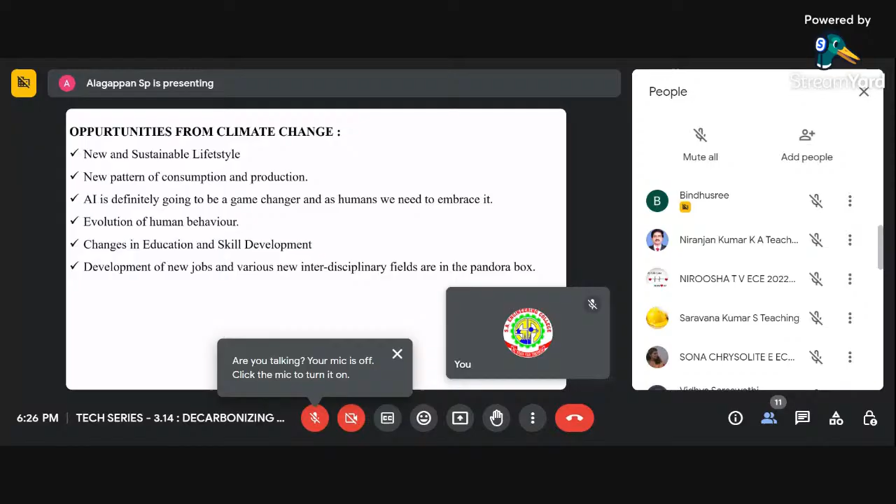Every one of us must have seen this 1.5 degree Celsius number and 2 degree Celsius number. We all know the significance of this number, because 1.5 degrees Celsius refers to the global rise in temperature, and 2 degrees Celsius also refers to the global rise in temperature.

But these two numbers are to be met at different periods of our lifetime. For 2 degrees Celsius, the Earth's rise in temperature must be maintained below 2 degrees Celsius for minimal damage. But to avoid the adverse impacts of climate change, we definitely need to meet the target of 1.5 degrees Celsius for the global rise in temperature.

Each one of us knows the problems that arise due to this: extreme weather, species degradation, water availability is getting reduced. Already we are facing water availability issues, and the Arctic and Antarctic, the polar regions, are melting continuously. And one interesting fact is that yesterday the UN published a special report on a temperature called wet bulb temperature.

What does the wet bulb temperature refer to? It means it is the maximum temperature up to which our body can handle and regenerate and cool itself without any external agents. The minimum threshold for this wet bulb temperature is 30 degrees Celsius.

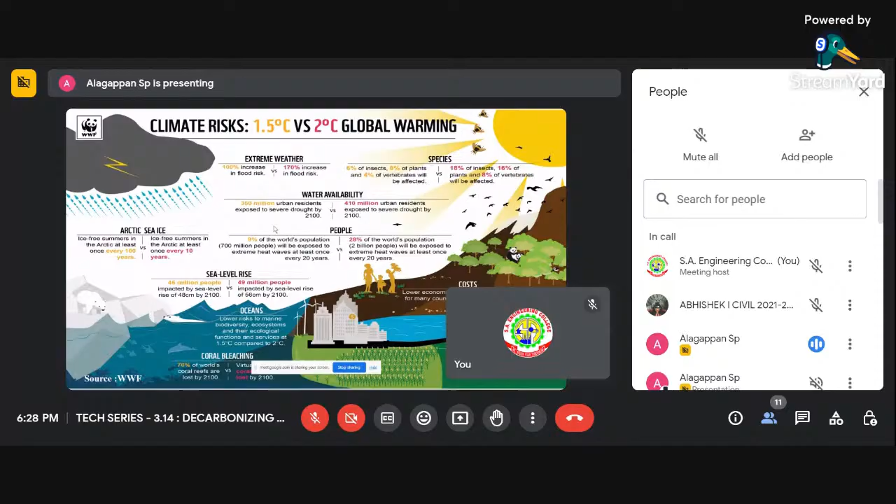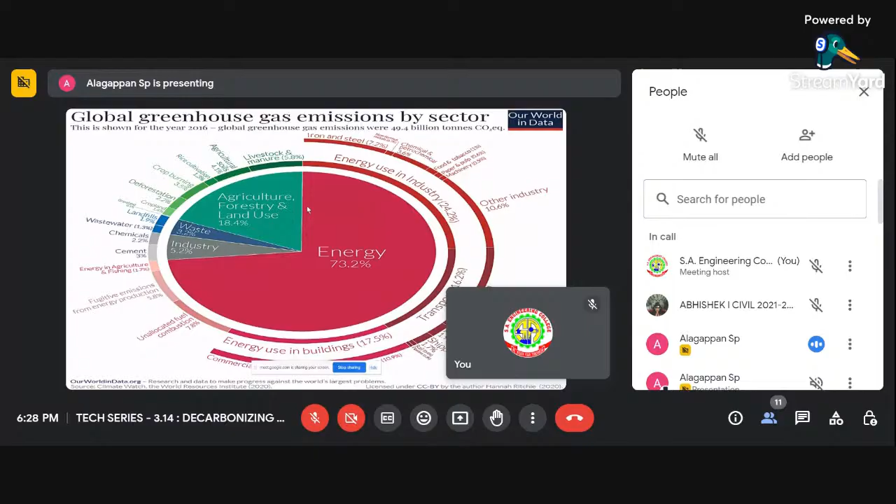This is one of the major drawbacks of climate change, and it's going to have a huge impact on the built environment also. The majority of global warming is caused by energy consumption: around 18% from buildings, 16% from transportation, and around 24% from energy use in industry. Energy use in industry and buildings itself comprises around 42 to 43%.

So this topic is going to mainly focus on energy use in buildings and energy use in industries, and also some industries related to construction: cement, chemicals, wastewater generation, landfills. All of this comes under built environment.

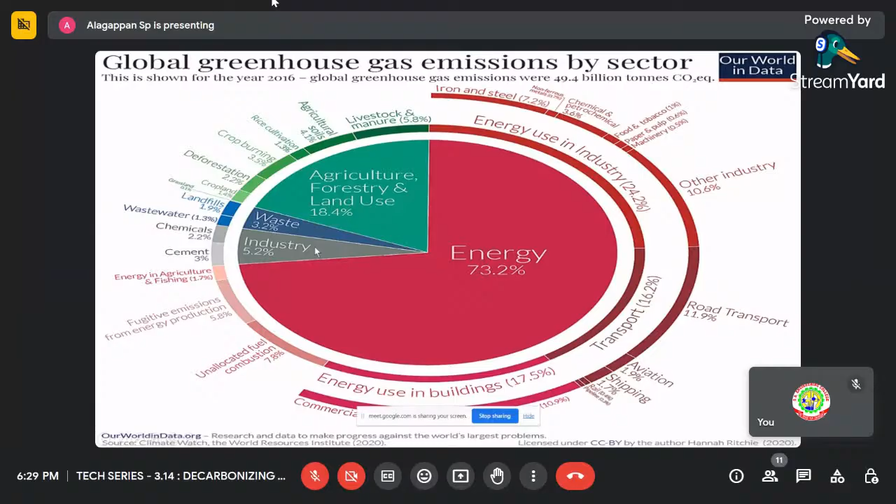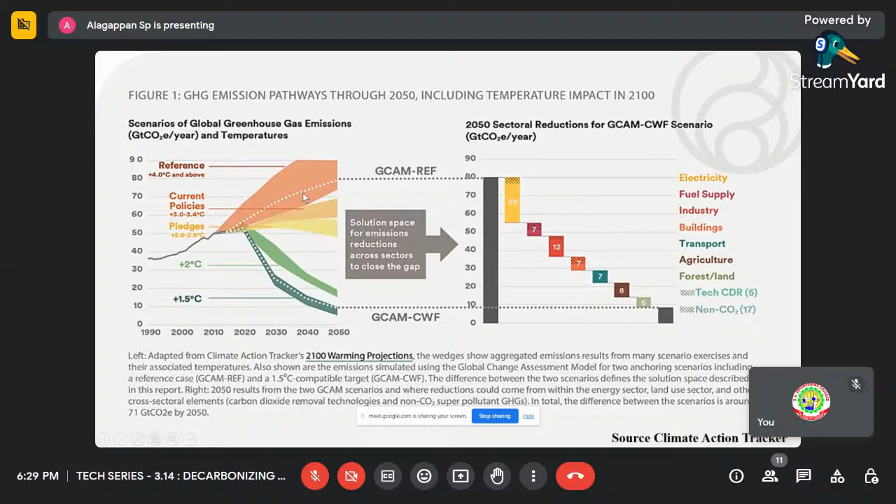That's why decarbonization in the built environment is one of the important factors for net zero transition. When I'm speaking about decarbonization in the built environment, it refers to both the existing buildings and the infrastructure that is going to be built in the future. So these two conditions are to be considered for this decarbonization.

During this process, we civil engineers alone cannot handle the situation. We need help and guidance from almost all sectors, including architects, environmental engineers, energy engineers, mechanical engineers, electrical engineers, instrumentation, chemical, biotechnologists, software engineers, policymakers, economists. Each one of them will play a specific role in decarbonizing the built environment. Only civil engineers cannot achieve this, so we need help from all kinds of people.

When talking about carbon in a built environment, there are two types: embodied carbon and operational carbon. Embodied carbon refers to the carbon dioxide or greenhouse gas emissions produced during raw material procurement, manufacturing of those raw materials, and transportation of the raw material for construction, and also during installation and construction process.

During the use phase, operation refers to operational carbon, that is the energy usage, water usage, and also waste disposal during the operation phase comes under operational carbon.

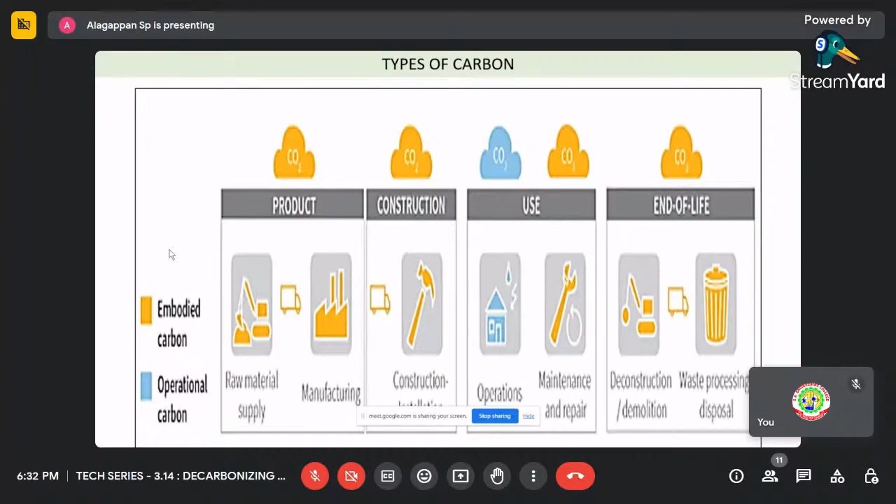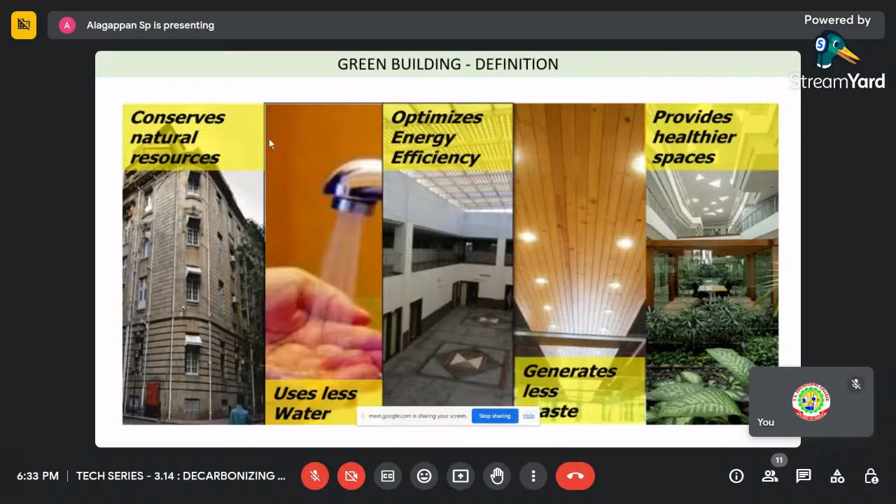So the main focus of this lecture is green building. Green building refers to the use of natural resources wisely during the construction and less water usage, optimize the energy efficiency, generate less waste, and provide a healthier spaces. Not only these definitions comes under the green building definitions, also the transportation of these raw materials and the one mentioned in embodied carbon also comes under the green building definition.

So somebody has to certify that this building meets the parameters standards. So there are some agencies around the world and in our country also. Some green building certification programs in the global level is LEED, that is under the USGBC, WELL certification and BREEAM certification. In India, majorly we focus on IGBC, that is the Indian Green Building Council and the Griha Council.

IGBC is one of the oldest institution in India, which started in 2001, and almost 90% of the projects in India currently are registered in the IGBC certification program. Griha also play a major role, but the number is very less.

So talking about IGBC, the vision of the council is to enable a sustainable built environment for all and facilitate India to be one of the global leaders in the sustainable built environment by 2025.

Today, almost the IGBC certification is done for 31 categories. Here you can see new building and existing building also, residential societies, that is apartment category, affordable housings, housing units, and also industries, factories, schools, hospitals, healthcare, resorts, restaurants, special economic zones such as industrial estates are also certified

for the IGBC certifications. Some focus is given on IGBC green interiors and also for service related buildings, some logistic park, infrastructure oriented business such as railways, MRTS, metro, airport, harbor, all these comes under this certification program.

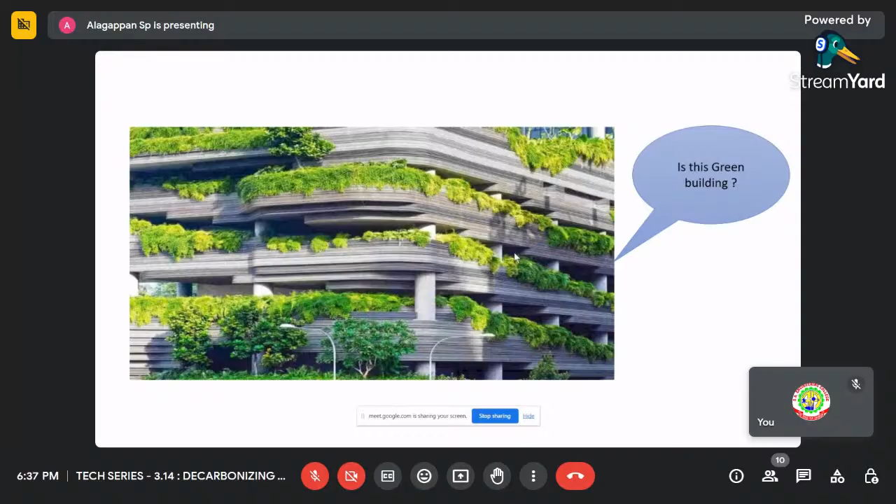So talking about green buildings, is this green building? The answer is it depends. Yes, at some cases this can be a green building. You might have seen the plants and mini sheds which are located on the balconies or windows or any special structures from the building or protruding from the building's exterior units. Sometimes it can be considered as an indicator in green buildings, but sometimes it is not. So it depends on the situation and the infrastructure we are focusing on.

So the IGBC mainly focuses on 5 categories. It was built on the Panchabhuta principle, that is the earth, water, energy, air, and sky. And these principles refer to the sustainable sites, water efficiency, energy efficiency.

Air refers to the indoor environmental quality, and sometimes the outdoor environmental quality is also included in the IGBC rating. The sky refers to daylight and night sky pollution, and some natural lighting is also included in the rating areas.

Here you can see 4 certification levels: platinum, gold, silver, or certified, based on different rating indicator numbers. Buildings are rated on a scale of 100. The basic score required to get the certified category is 49 to 50, and it increases up to platinum. Platinum refers to buildings of global importance in the green building sector, and gold refers to buildings of national importance. Silver and certified also have similar levels of importance.

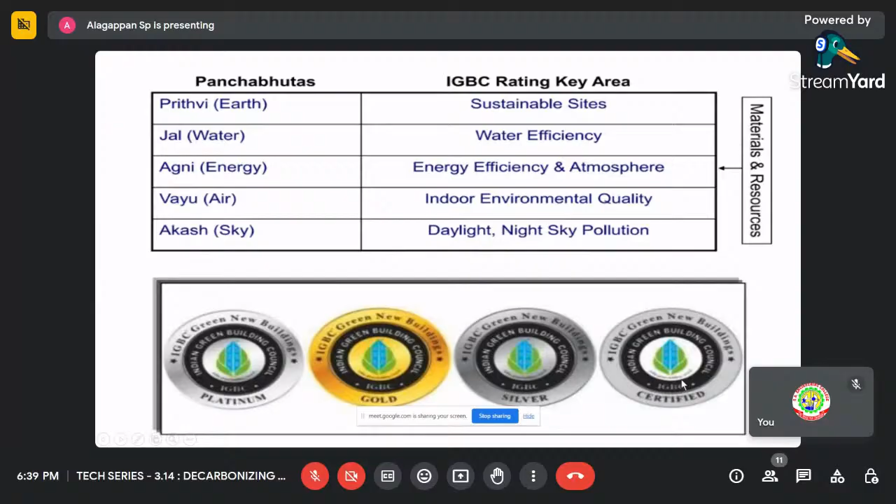Speaking again, this is the main area of focus of the rating systems: water conservation, handling of consumer waste, energy efficiency, reduced use of fossil fuels, and reduced dependency on virgin materials. Virgin materials refers to the use of fossil fuel materials or highly embodied carbon materials in the construction of buildings. Some building materials and resources also need to be accounted for this purpose. Health and well-being of the occupants, that is the indoor environment, is also accounted for.

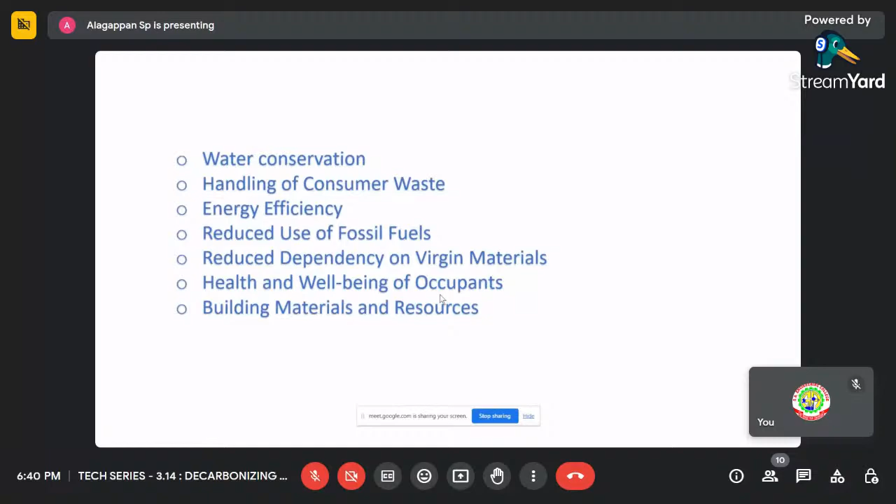Now we are going to focus on each category and what indicators are to be scored under each of these categories.

Here you can see the market potential of green buildings in India is around US $300 billion.

Material or equipment replacement that needs to be followed in green buildings includes usage of high performance glass, fly ash blocks - currently replaced with AAC blocks - wall and roof insulations, and high albedo roofing materials. Albedo refers to high reflective surface materials; a perfect example is white paint, which is a high albedo roofing material. Also, use of low volatile organic compound paint, adhesives, and sealants. Some carpets are also certified as green.

Some wood materials and eco-friendly housekeeping chemicals are used, for example the ones used for cleaning the bathroom, toilet, or mopping the floor. Some chemicals need to be used eco-friendly, and this usage of material is also considered an indicator in these green building certification programs. Some of the IoT systems are CO2 sensors, wind towers, water zone and root zone treatment systems, or water treatment plants. Nowadays, waterless urinals are being used for reduced water consumption, and energy simulation and energy monitoring devices are also used in green buildings.

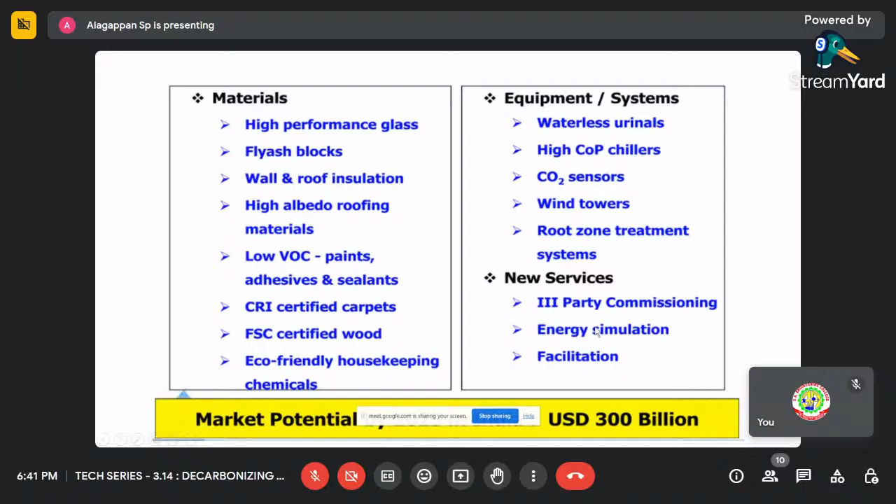Now I'm going to focus only on the indicators, not on their importance. Different indicators have different importance and different scores, so I'm not going into very much detail.

The first one is sustainable architecture and design, which consists of 3 credits, and site selection and planning. Almost the site selection and planning is the major area where the majority of the indicators are counted - local building regulations, soil erosion control, basic amenities, and usage of low emitting vehicles. For example, in office environments, colleges, or institutions, business commuting and office commuting is one of the important factors, and emissions from these vehicles are also considered for the IGBC certification programs.

Some other indicators are transplantation of trees which we fell, cut, and replace and preserve in different places; heat island reduction; outdoor light pollution reduction; and universal design. Some green building guidelines also cover basic facilities for construction workers during the construction process.

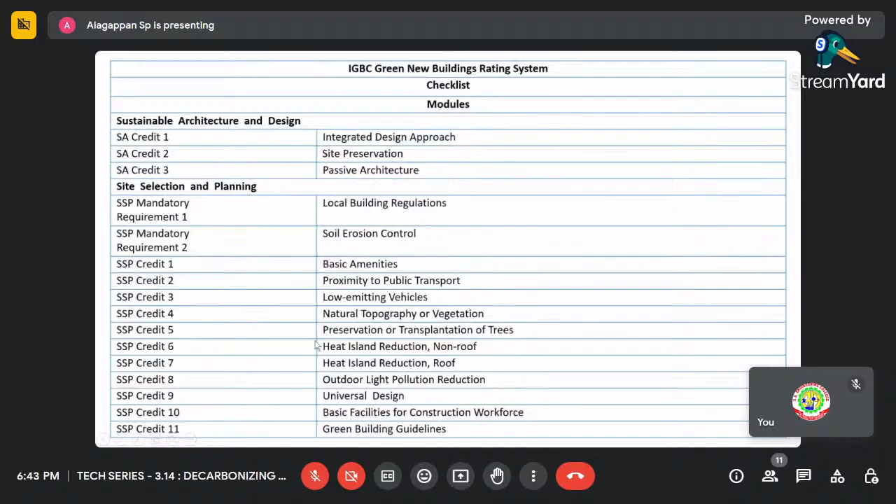One of the important factors here is heat island reduction, in the non-roof category and roof category. So what is heat island? Urban heat island refers to the formation of a heat dome due to the close proximity of buildings. Mostly urban areas, that is city regions, will face this urban heat island phenomenon, but in village or rural sites, this phenomenon is much lower.

Definitely we cannot avoid this heat island formation; we can only reduce its impact, and it is done in 2 categories. For non-roofing areas, provide shades with open structures, or in road environments too - instead of using bituminous surfaces, which are very much heat absorption materials, paving materials with low solar reflectance index can be used, and also tree shades can be used.

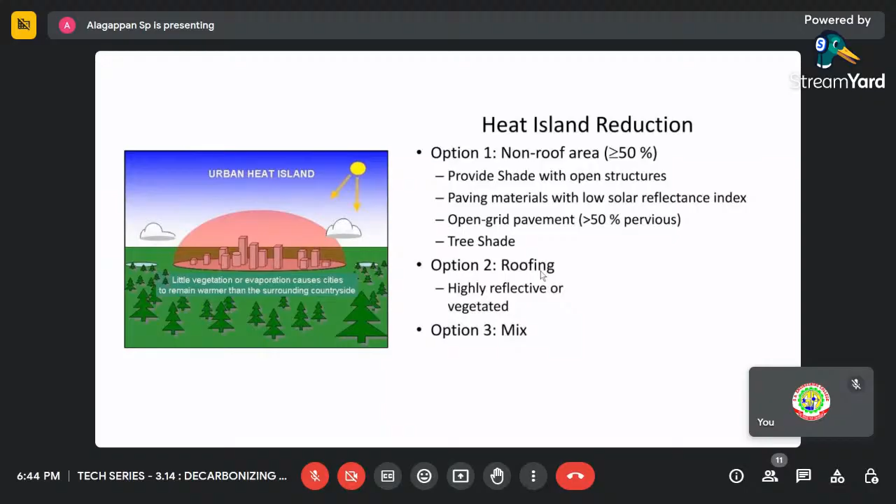The other system is roofing systems - we can grow plants on top of the building, such as terrace gardens or other green plants. Today there are some plant species which are very much focused on green building initiatives, and those are used mainly for this purpose. Option 3 is using a mix of both the non-roofing area category and the roofing category. So these are some of the options now available for reducing the urban heat island.

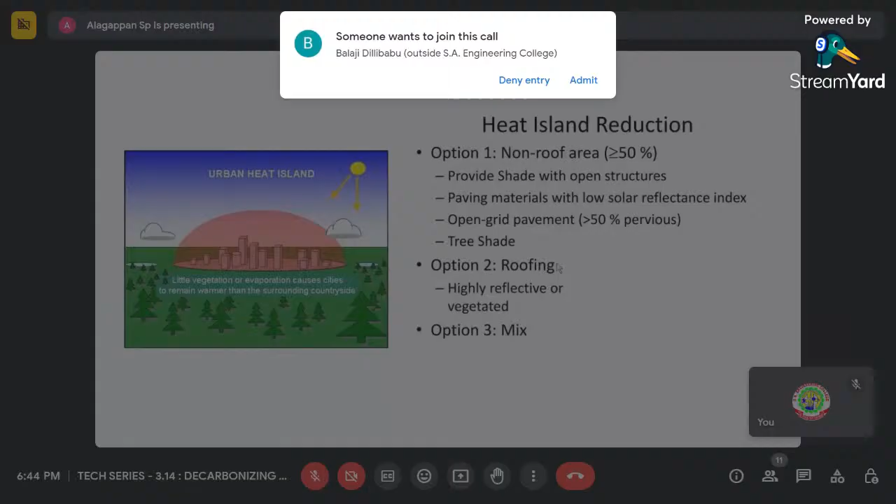And the next one is water conservation. Some credits and indicators are on a voluntary basis, but some credits and indicators are on a mandatory requirement, such as rainwater harvesting, roof-based water harvesting, and water efficient plumbing fixtures. These two indicators are mandatory requirements for getting the certification, and the rest are voluntary basis.

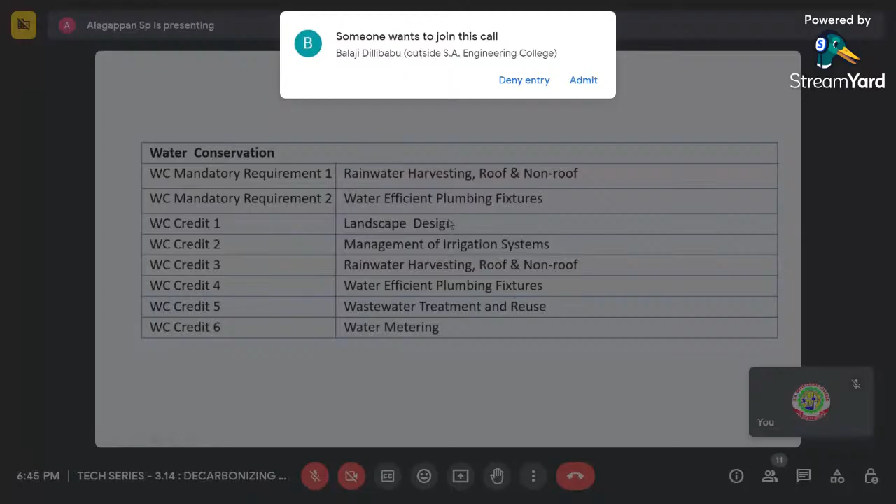Here you can see wastewater treatment and reuse, water metering, management of irrigation systems, landscape design, all come under water conservation.

Today, waterless urinals are used in restrooms to reduce water consumption, and fixtures like sprinkler systems or spray systems are used, along with water metering, both involving IoT, the Internet of Things. Sensors are all connected to a central server and monitored, and based on the data collected from these systems, the water flow and water quality are also maintained.

This not only reduces water consumption, but also enables us to reuse the wastewater for further usage in flushing systems or even in air conditioning systems.

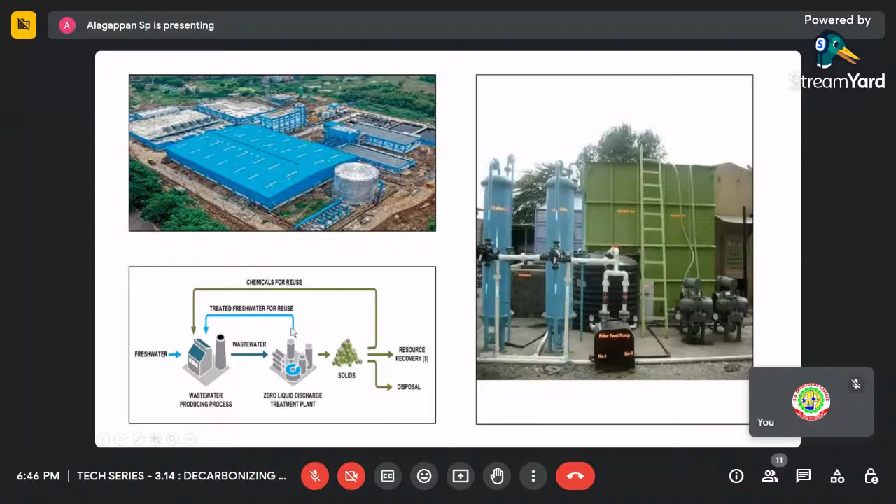Some of the wastewater treatment plants now in use are these. This zero liquid discharge treatment plant is one of the latest important processes in wastewater treatment. This refers to converting almost all the liquid into solid material, and these solid materials are recovered for other chemicals, disposal, or other resource recovery.

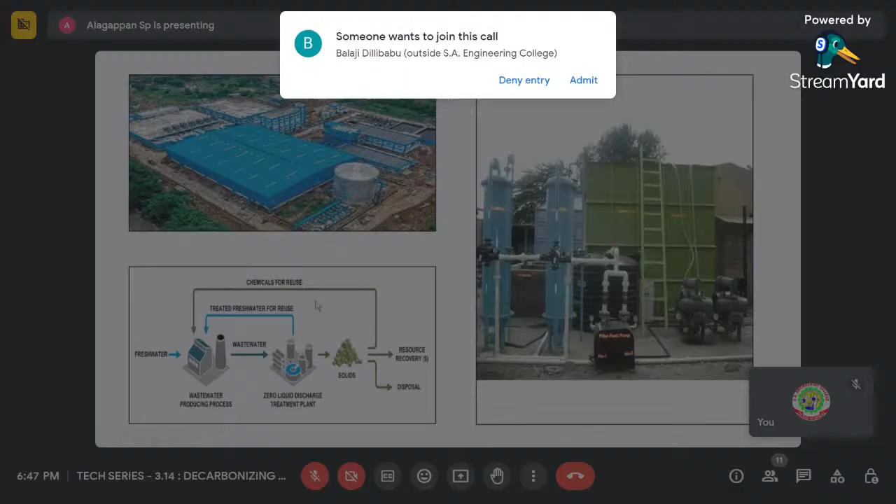Almost 99.9% of the liquid is removed from this process, and many office buildings and institution buildings are getting into these ZLD systems, that is the zero liquid discharge systems.

Coming to the major part of this decarbonization is the energy part. So energy efficiency has a direct impact on greenhouse gas emissions, and ozone depleting substances also play a major role in the energy part.

Today, 410A refrigerants and 134A refrigerants are being phased out since they have a high global warming potential. So what is global warming potential?

For example, release of 1 ton of refrigerant - the 410A category of refrigerants is equivalent to almost 2088 tons of carbon dioxide emissions. It's a highly carbon dioxide potential category.

So nowadays, these high global warming potential refrigerants are being replaced with R32. R32 has a low global warming potential, which is around 675 tons of equivalent carbon dioxide emissions.

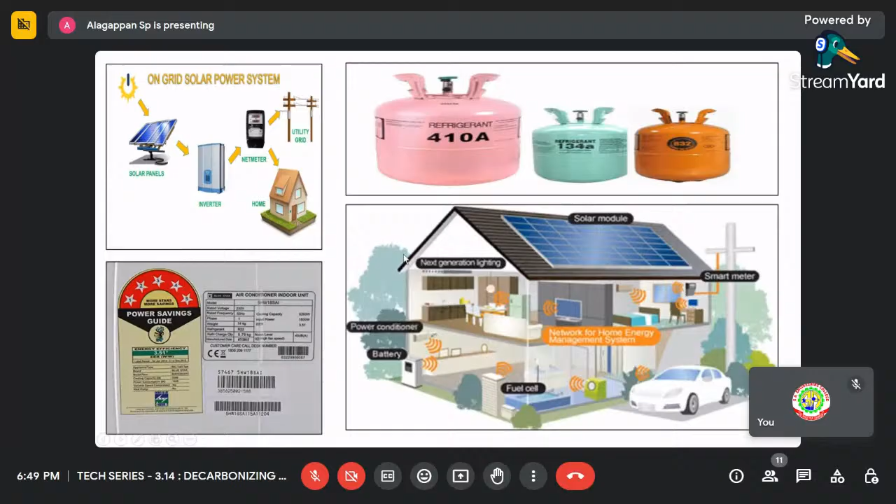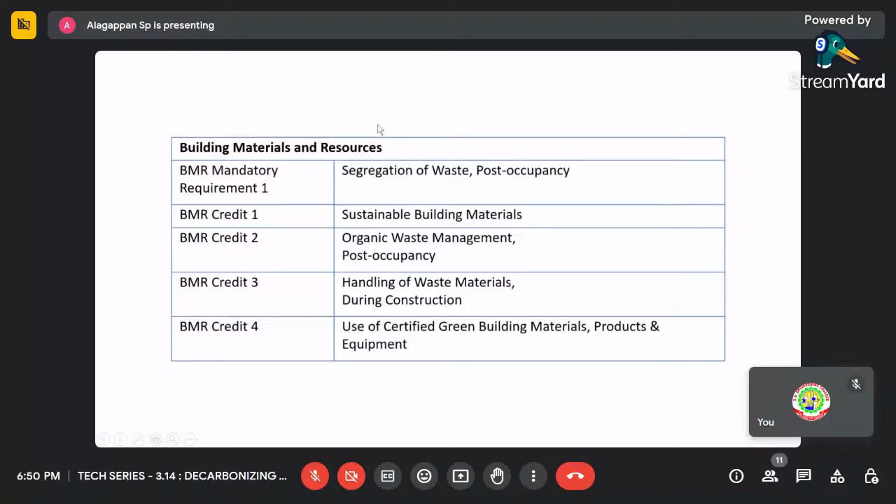Another one is building materials and resources: usage and segregation of waste post occupancy, usage of sustainable building materials, organic waste management, handling of waste material during construction, and certified green building materials, products, and equipment. These are considered for scoring purposes, and the first one is a mandatory requirement.

Nowadays, interior partition walls using prefabricated structures are also used. Instead of that, bio-organic based bricks are also coming.

That is the mycelium bricks - mycelium is a special category from the family of mushrooms, and the mycelium culture is prepared from the mushroom and mixed with construction waste, that is C&D waste, and this is made into blocks or panels, and sometimes sheet structures as well.

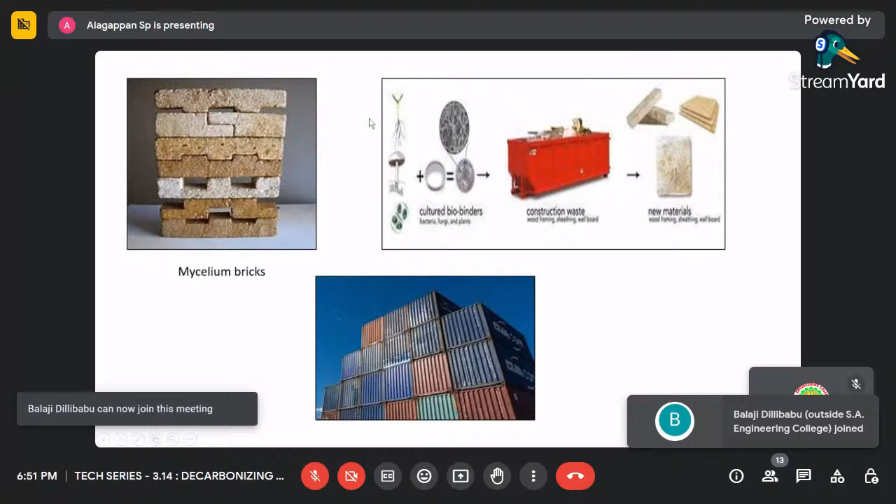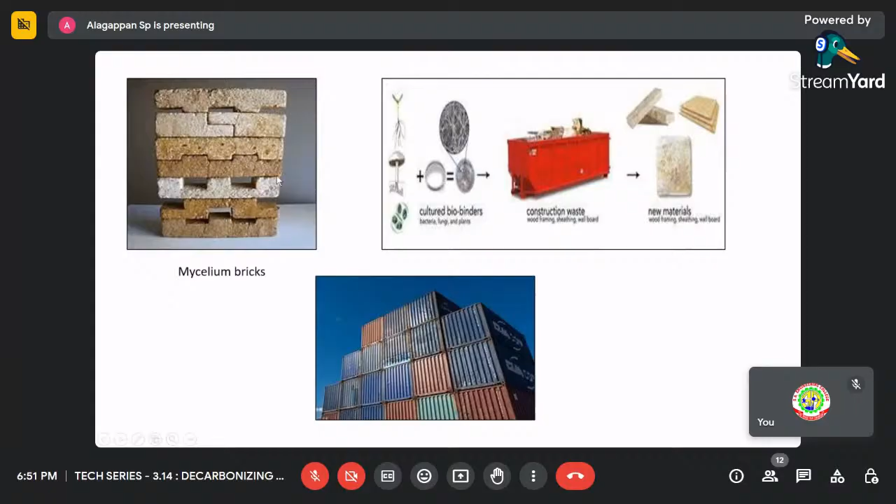This is going to play a major role in the future of the interior built environment, specifically for partitioning or even some tables or chairs. All these structures can be built using mycelium bricks.

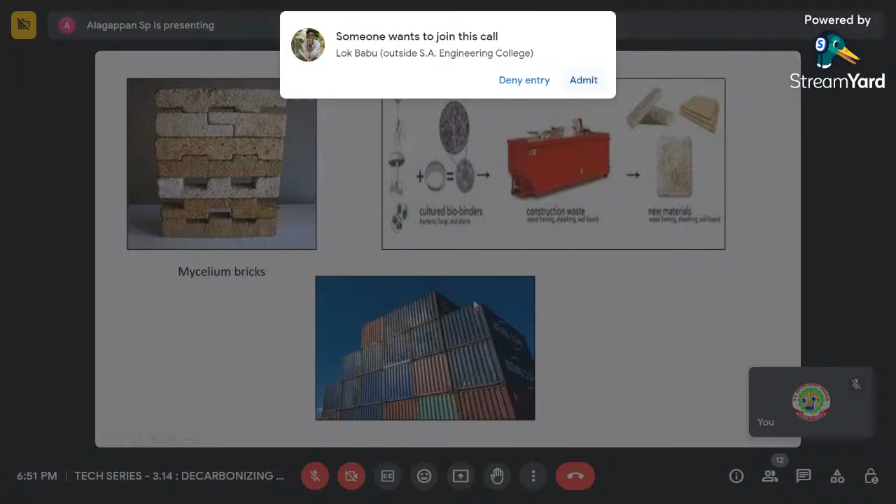Surprisingly, green building certification also includes the usage of shipping containers for construction purposes. For example, this building - some of you might know this building - is famous music director A.R. Rahman's studio, and this building is almost 85 percent constructed from shipping containers, and it's an IGBC certified building of gold category.

So IGBC also encourages such kinds of buildings.

Regarding indoor environmental quality, there are two categories for mandatory indicators. One is the minimum fresh air ventilation and tobacco smoke control.

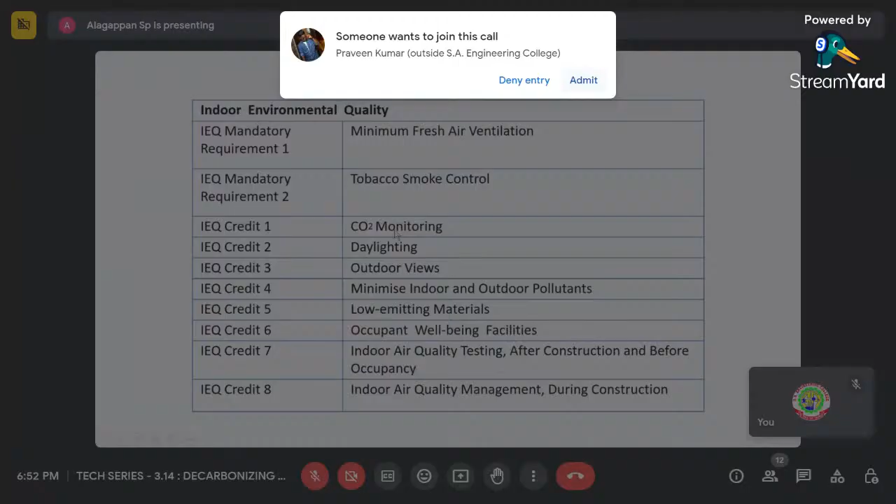Tobacco smoke control systems must be employed, and some voluntary basic indicators are CO2 monitoring, daylighting, outdoor views, minimizing indoor and outdoor pollutants, low emitting materials, occupant well-being, and indoor air quality testing, after construction and before occupancy.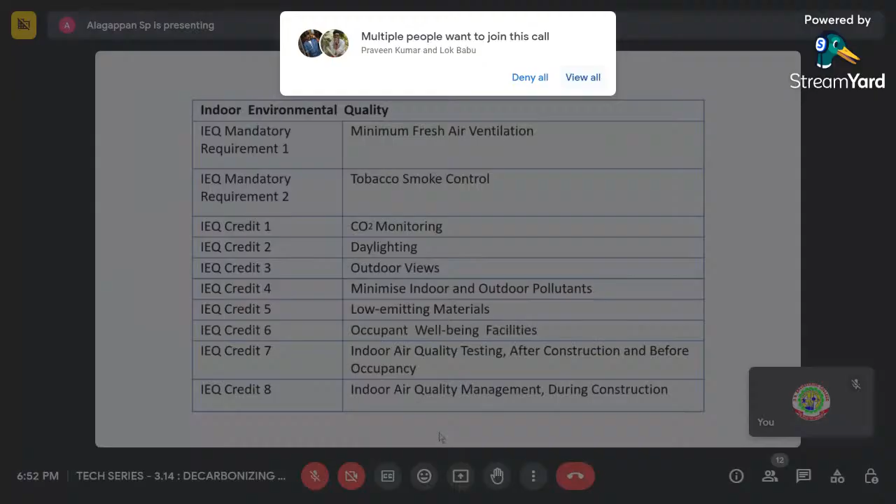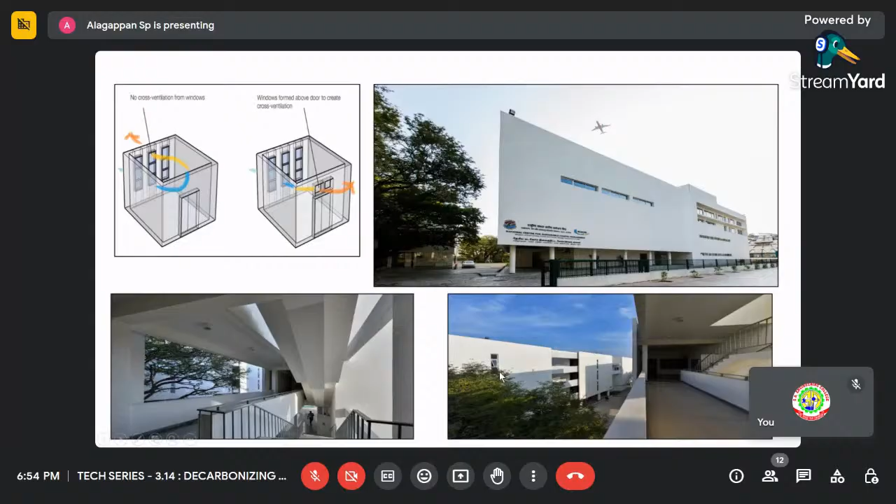The final one is innovation and development, which is a voluntary basis credit mechanism. The 4 processes are innovation design process, optimization in structural design, and wastewater reuse during construction.

The one mentioned in water conservation is wastewater reuse during the occupancy period. So there is a difference between these two indicators.

And the final point: all these rating systems or certifications are to be done by IGBC accredited professionals.

The last part majorly focuses on some of the IGBC buildings around India. Most of us may know this one, the Bombay House, the Tata headquarters in Mumbai. It is one of the oldest buildings, around 150 years old.

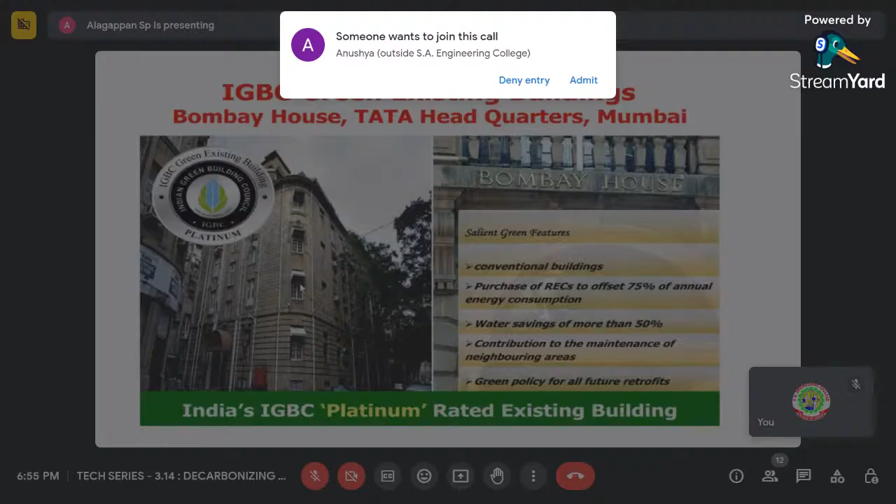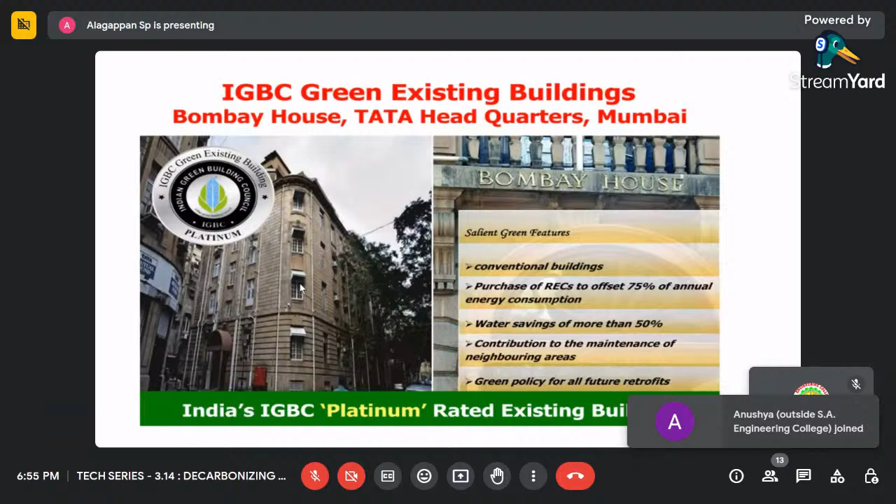It got renovated and received an IGBC Green Building certification of Platinum category. This is the only existing building in India mainly focusing on a building of very high age, around 150 years old, where high heritage value was also considered in the process.

Our famous Anna Centenary Library is also an IGBC certified building. It's a gold rated building.

The Omandurar Government Hospital is also an IGBC certified building. This building was first planned as an assembly building for the Tamil Nadu government, so the record created during this construction was that it was the first assembly building in India to get the IGBC certificate rating.

Recently, you must have seen the new Parliament building for India, which is also certified for IGBC platinum certification, and LEED certification was also done for that building.

A famous one, Ramapuram DLF, everyone must have seen that. The L&T construction offices inside the L&T constructions and the DLF campus are IGBC certified buildings.

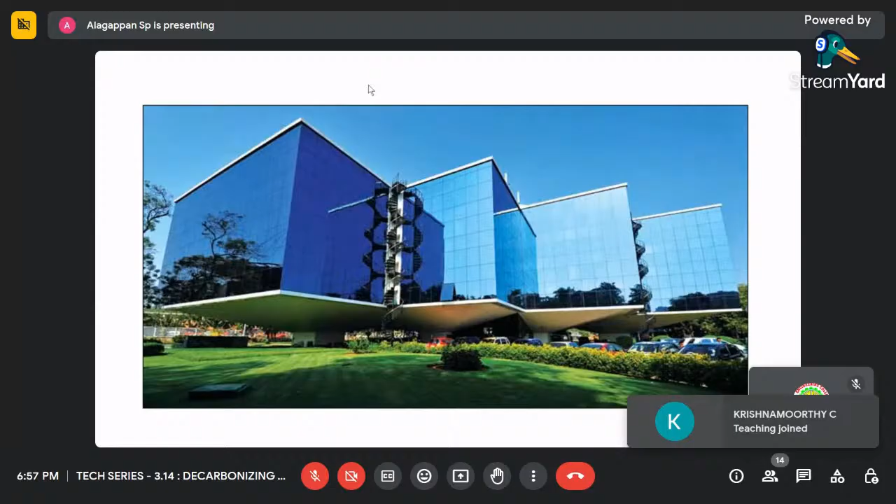Many buildings in the IT sectors, in the Siruseri zones, ECR and OMR, are all certified for green building certifications. This one at Guindy, that is the Zoho headquarters, you must have known.

Not only Chennai, but tier 2 and tier 3 cities' office buildings and institutions are also getting their green building certifications.

One perfect example is the Cognizant campus at Coimbatore. There is also a real estate township, the second township in India to get green certification, also in Coimbatore.

The first airport in India to get the IGBC certification is the Indira Gandhi International Airport in Delhi. Within 2 to 3 years, all major airports in the country, including tier 2 and tier 3 airports, will be certified with IGBC.

The energy requirement will be met from renewable energy systems for around 80 to 85%. So it's one of the major milestones in this green building certification program.

I'm ending with a conclusion note that all these certifications are not to be obtained only for namesake purposes. Every industry, city, or building is continuously monitored, and the license needs to be renewed for a specific time period for each category of buildings. Only then can the buildings be certified with these green building lines.

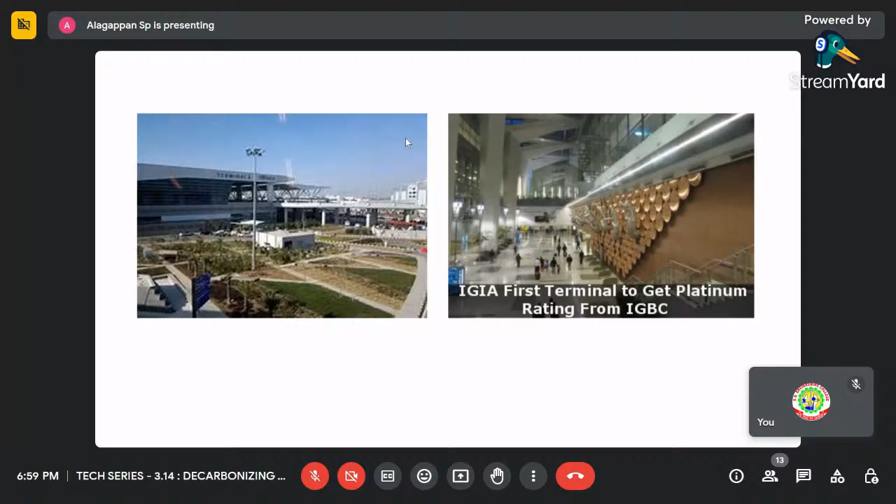So they get projects. This kind of certification is one of the important factors, and it's going to play a major role in foreign exports, and also for India's forex reserves. These are some of the indirect benefits.

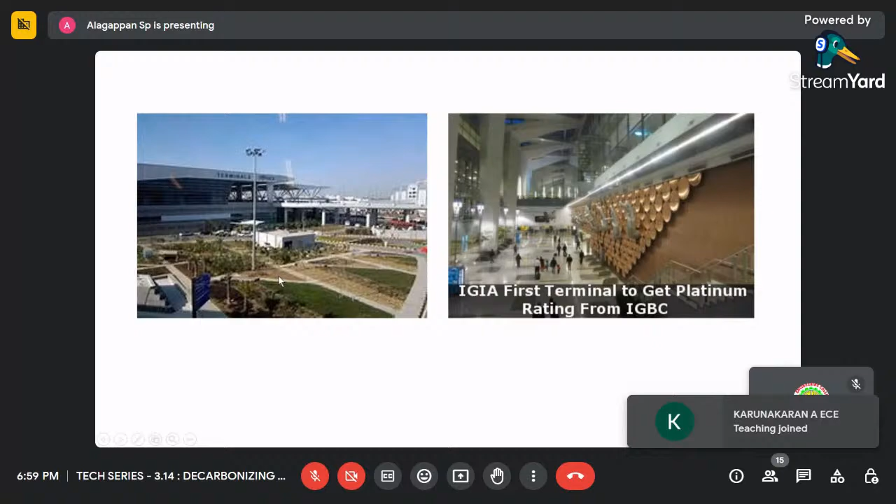So I conclude my lecture, and now it's time for questions. Any questions?

Hello. Hello. Yes, sir. Ah, it's over.

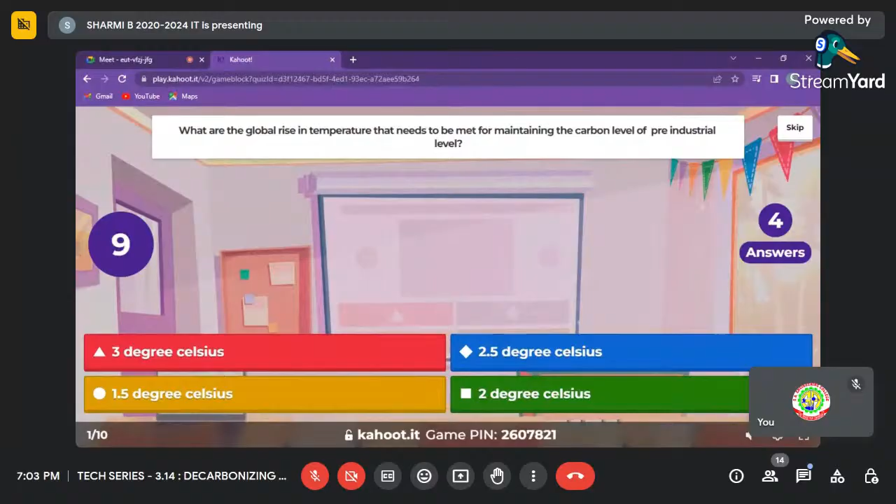Your first question is: what is the global rise in temperature that needs to be met for maintaining the carbon level of pre-industrial level? Your options are 3 degrees Celsius, 2.5 degrees Celsius, 1.5 degrees Celsius, and 2 degrees Celsius. 11 seconds only left. Okay, 2 members answered correctly. Let me move to the next one.